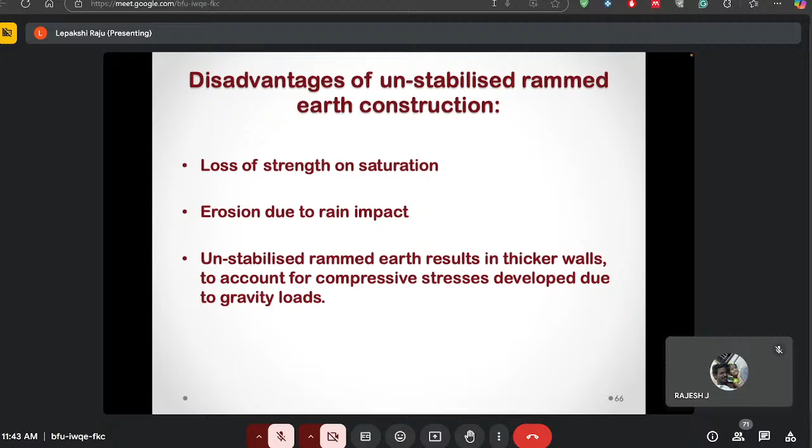Because there is no stabilization, it has to compensate the gravity loads. At least 1 MPa load should be taken at the bottom of the building. For that, unstabilized walls will increase in thickness. The walls will be around 1 foot to 1.5 foot at the bottom, and then they will go tapering on top. So these are the disadvantages of that.

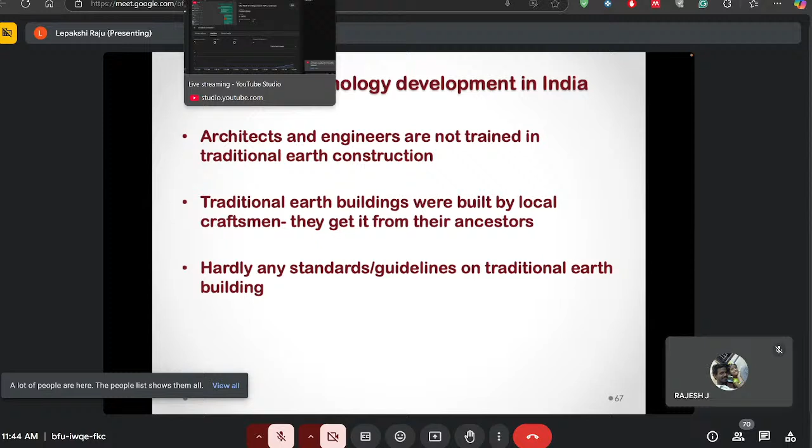And the R&D in India for these earthen buildings is comparatively less. Engineers and architects are not really getting trained in this particular usage because of not having good clients for them, and finding laborers is a very big problem, and there are hardly any standards and guidelines for this particular thing.

So that's why cement stabilization becomes ideal for coarse grain gravel. This improves strength, and what happens? Soil plus cement plus water forms a gel, calcium silicate hydrate gel. Over here one interesting thing happens. It establishes water insoluble bonds and binds the sand and silt particles. So when you mix your soil having 15% of clay with your cement and water, it forms a gel, leaving your clay particles alone.

There is research that was done by one of my colleagues with my professor, where she could literally retrieve the clay back from stabilized mud blocks. Which means when you can retrieve your original material back at its end of life, it is a sustainable material.

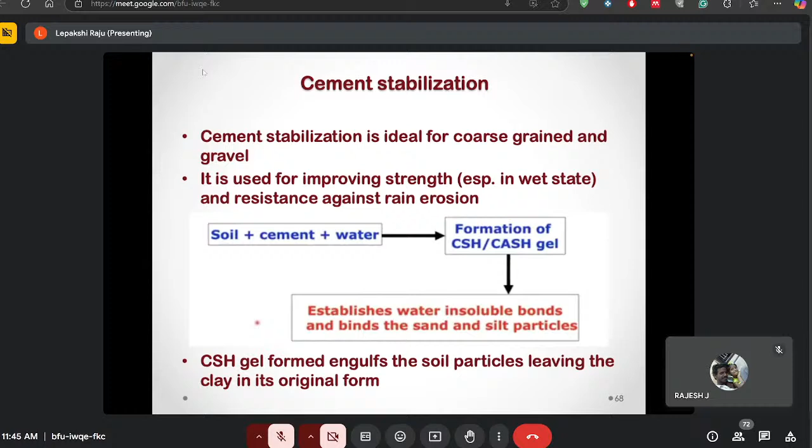This is what I wanted to tell, that rammed earth and stabilized mud blocks are sustainable as well as green materials, because they use a very small amount of cement, so carbon becomes less, and there is no heating, no carbon emission in that particular process. Using very less cement contributes to the green element. And you are retrieving the soil at the end of life. So it is a green as well as a sustainable material.

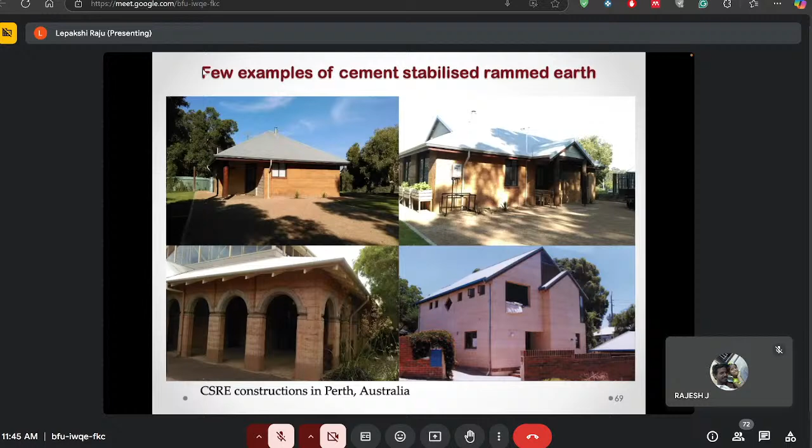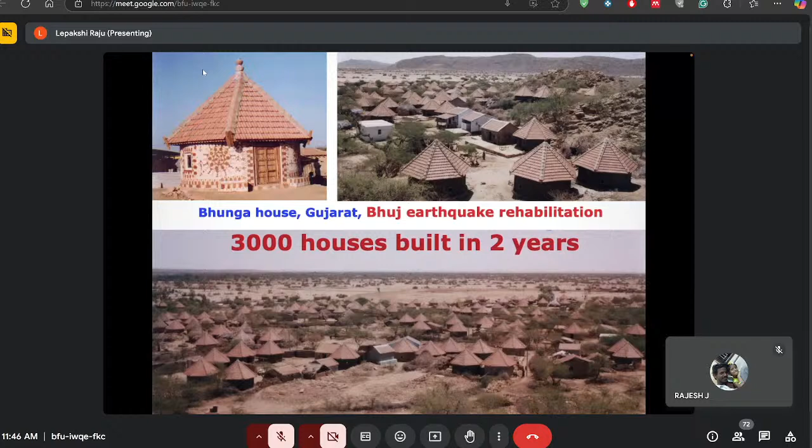Benefits of rammed earth: high thermal mass, noise reduction, it is strong, it is durable because of its weight. Low maintenance, you don't have to plaster it, and that brings down the cost. Low embodied energy, no heating, nothing. If you're using anything mechanical, it is only the mechanical tamper.

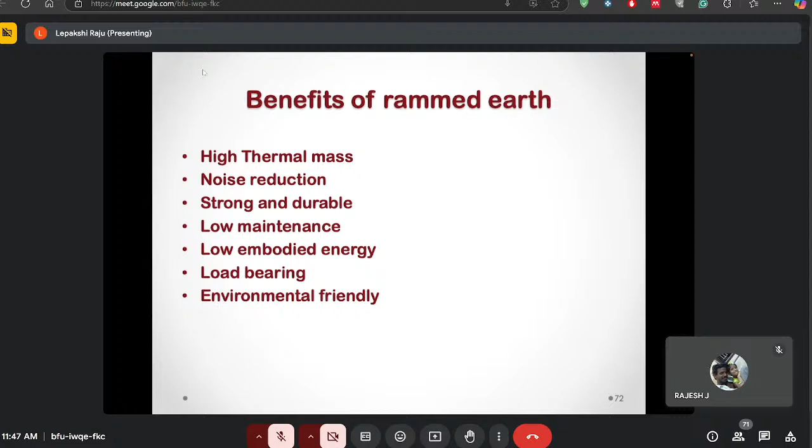You can also design the whole building to be load bearing without a frame structure. That makes it even more green and sustainable, because you don't have concrete getting into the building envelope, and it is environmentally friendly. It is also versatile in form, texture, and shape.

Form in the sense you can have any kind of form, like these forms, and you can see these kinds of alcoves can be made. Texture is something that is happily practiced by different architects now, giving it a tinge of blue, green, red, whatnot. Different shades of rammed earth by mixing coloring agents, in a very small quantity, so that it doesn't become hazardous to human health. And you can also include alcoves, which can be used for different purposes.

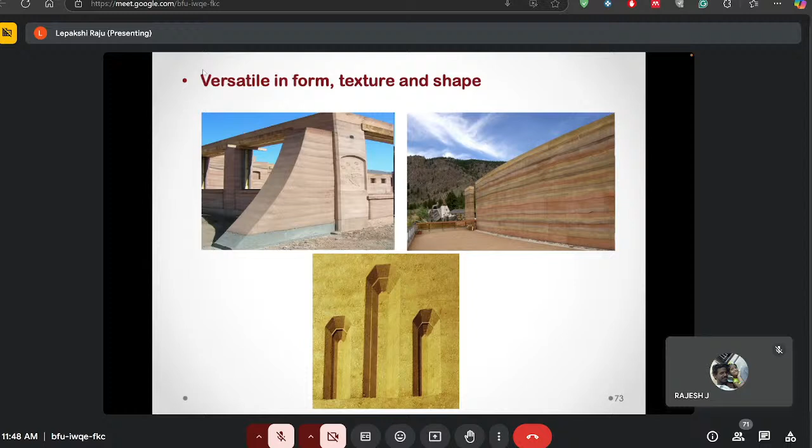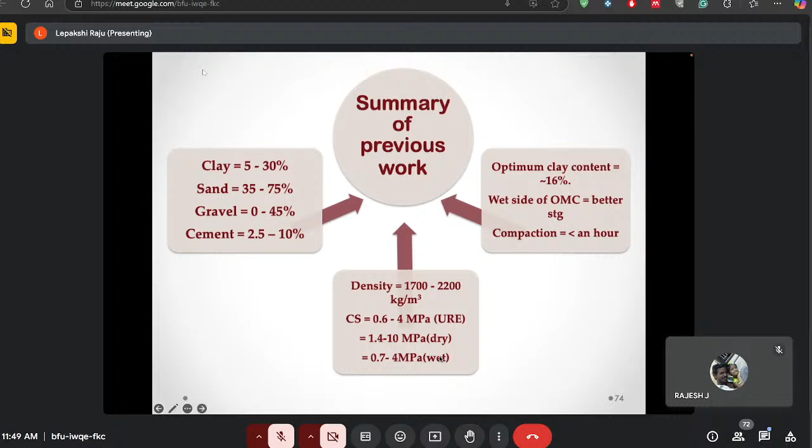So this gives a gist of the work that I conducted in my PhD studies on characteristics of cement stabilized rammed earth. My core focus was only on CSRE, cement stabilized rammed earth alone. So I didn't go to study the mud blocks.

Influence of layer thickness and superplasticizer. I came up with the optimum layer thickness and how much superplasticizer addition can actually decrease the energy consumption. So we've got very beautiful results that can be used in the industry, not just go into the papers.

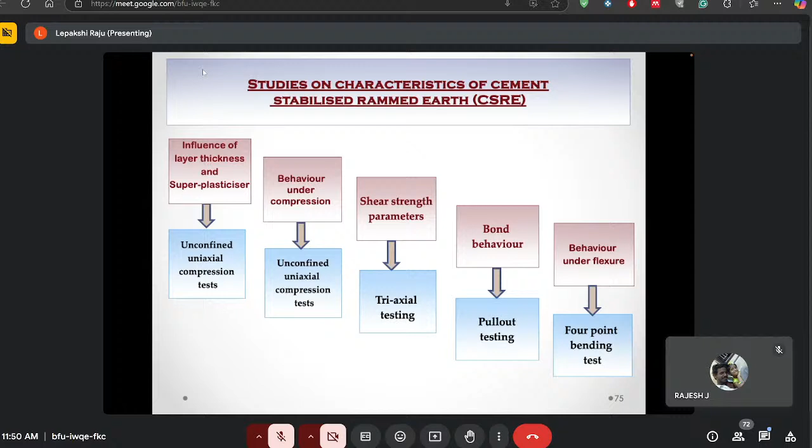Behavior under compression. Here we understood the stress strain characteristics, and I've also come up with an analytical model that can predict the compressive strength of a particular mix proportion without having to do the mix, make a cylinder or cube, wait for 28 days to get your 7-day and 14-day strength, and test it. You can literally put the values into an analytical model and get your compressive strength in dry state or wet state. That particular model, I've developed.

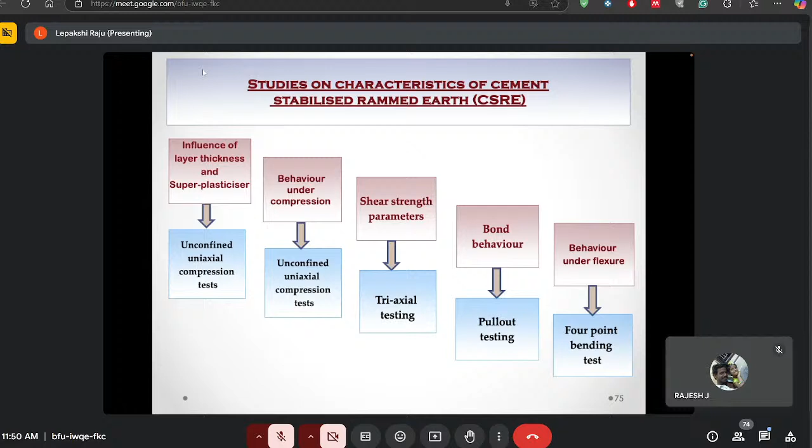Then shear strength parameters of rammed earth, bond behavior, and behavior under flexure. So this was my contributing work at IISc in cement stabilized rammed earth. I wanted, yes, so I'll just stop.

So I wanted to bring about the understanding of why we should select materials for construction, how rammed earth is green, how earth materials are green, why they are green, and what other solutions could be used or taken into account for future generations.

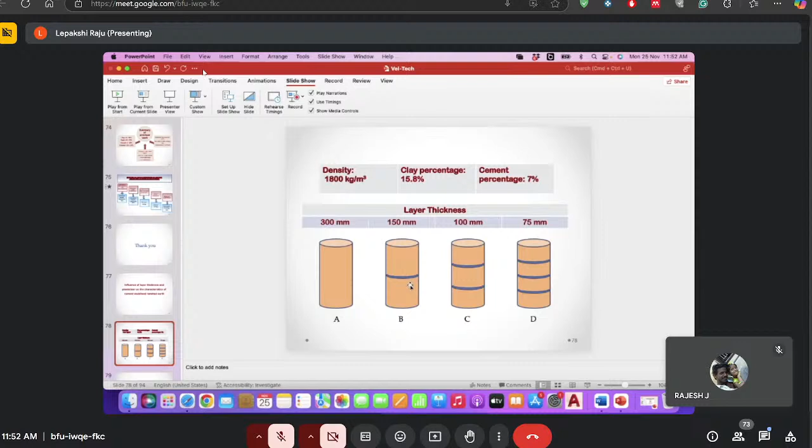Am I audible? How do I stop presenting? I'm not finding the option. The bottom. Did you find it? Next to the send reaction, next to that. Why am I not finding it? No, you should come out of the presentation. Just minimize the screen. Stop presenting. Yes, that one. Thank you, Dr. Lepakshi.

You started with defining what green is, and then you went a long way through talking about renewable resources, and then sustainability, and we ended up in rammed earth. Actually, we are running short of time, so we can have a quick couple of discussions.

I think someone has raised their hand. Yes, please. Mr. Rajamuniasamy, do you have any queries or clarification? Now the forum is open. No, okay, he said no. Any other questions? I think there are no other questions. So this brings up the question of whether I put everyone to sleep.

It was not like that. Whether anyone understood anything. You said anyway, plenty of information. Thank you so much. Thank you all for joining. Someone has again raised their hand.

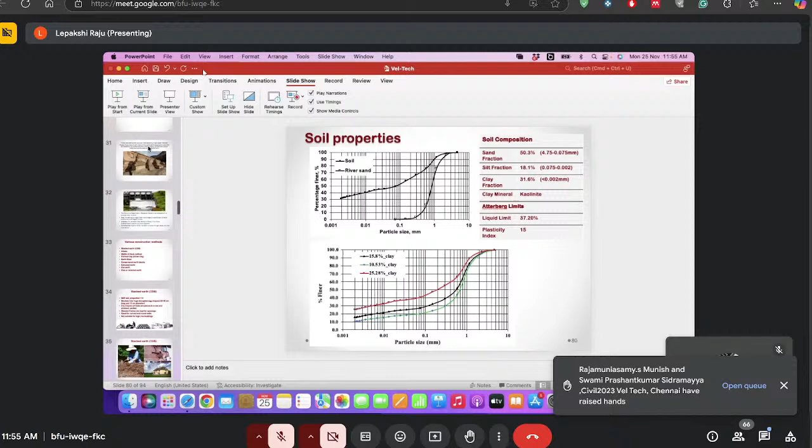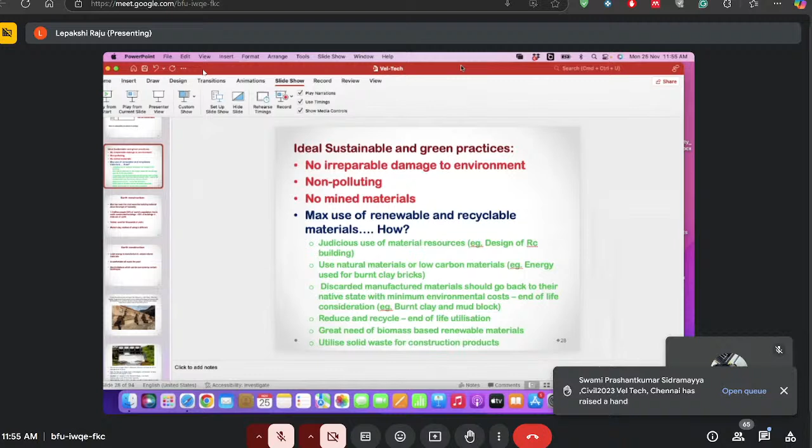This one? Is it visible sir? No. It's visible for me, I think it will come there. Is it visible? No, still not. No, Dr. Lepakshi, you just keep it there, maybe his network is a little slow. Is it visible for you Logeshwari? Yeah it's visible. So it's visible right now. Kindly check. No, I'm just finding it.

Okay, you can go ahead with the question. Anyhow, I will make it clear. You spoke, ma'am, about the carbon emission due to cement and extra addition of cement. As you said, the owner is forced to put more cement, which will increase the strength, but it is not economical, and it may not be proper.

At the same time, what would you like to speak about steel? Because steel is such a material that can be reused, as we can say, even after being kept for a long period of say 2 or 3 years, if it has proper tensile strength, what would you like to say?

It has to be used, undoubtedly. It has to be stored in the right way again. Steel cannot be just left in the environment, allowed to rust like anything, and then you say, okay, I have steel and you can use it. It's no more steel, right?

If you have that, you are again going to increase your cost by cleaning the rust out of the steel, because even if you leave a small amount of rust in your steel from leaving it in an open environment, that is again going to cause damage to your structure.